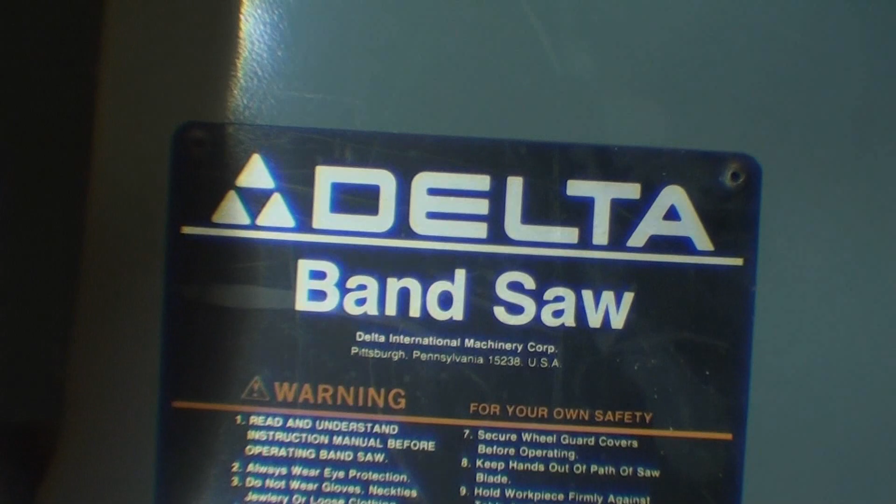All right, I'm going to do a little study here with some old Delta catalogs and show you what they had in the catalogs. You can skip through this if you don't like it.

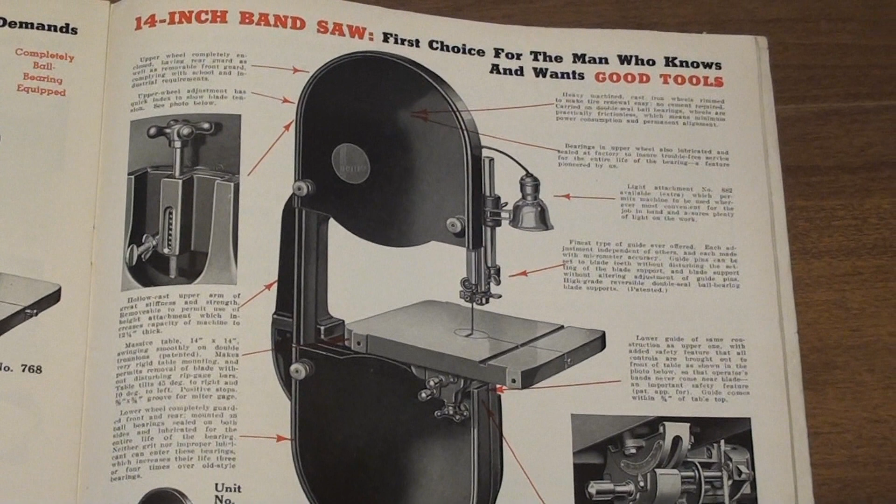This is the 1940 Delta catalog, in kind of poor condition, and it's rather thin compared to the later ones. But there is a full page and a following page also of the original Delta, probably about like what Jimmy had. And it was available only in wood cutting then.

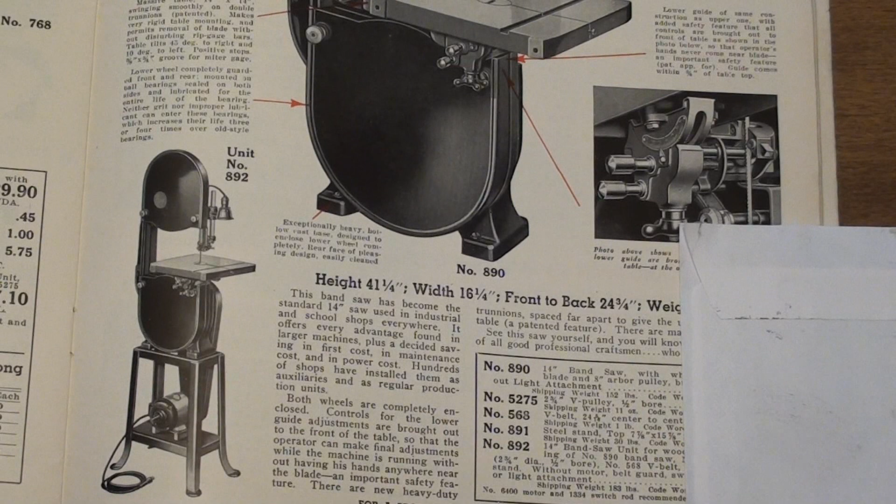But notice the open stand. They sold many different stands for it over the years. This is an open one with the motor below. Came with a work light, and many of the parts are the same. Again, the tubular type casting for an arm.

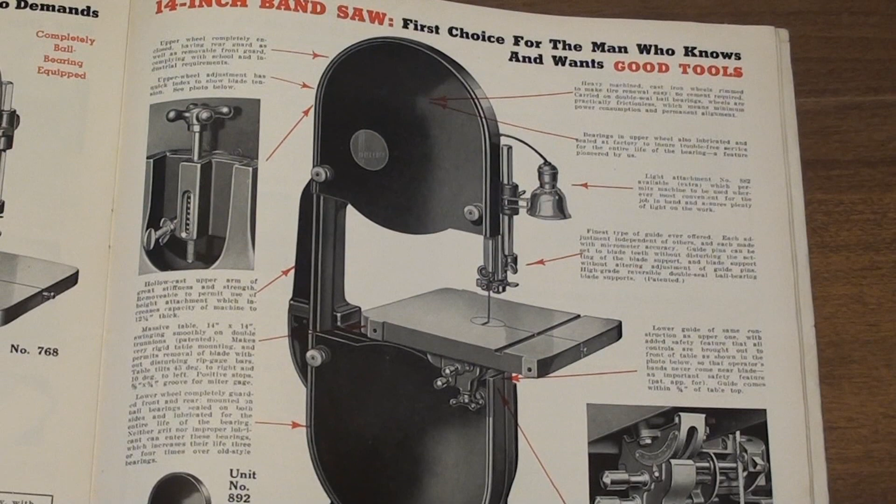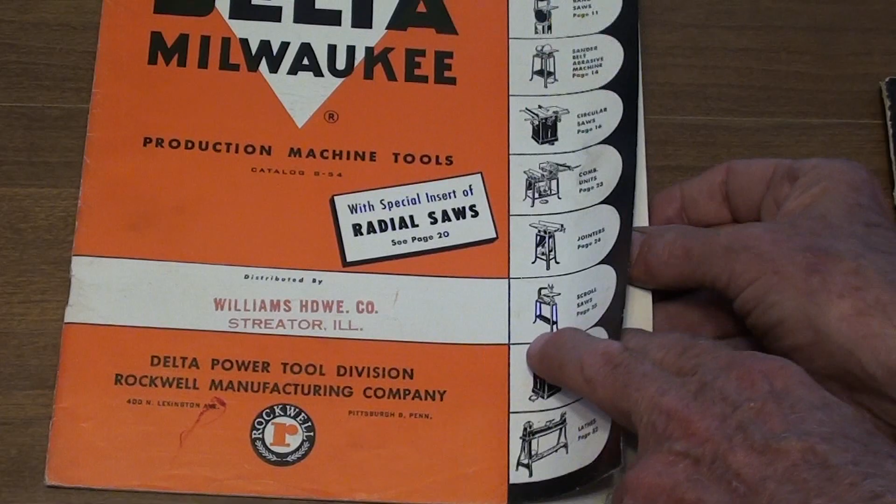Skipping ahead, this is the 1954 Delta Milwaukee catalog. See, they changed the name. In the previous one, it just said Delta, it did not mention Delta Milwaukee. But down at the bottom, they are already a division of Rockwell Manufacturing. And this catalog is quite a bit thicker than the previous one I showed you.

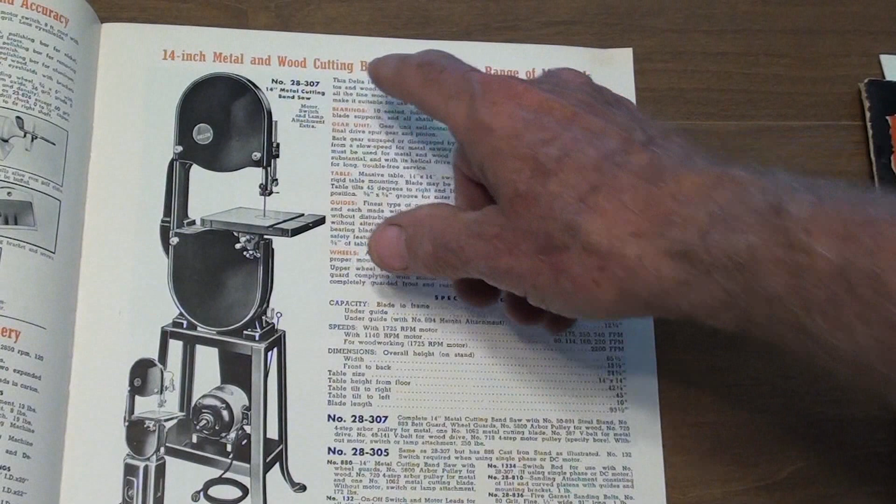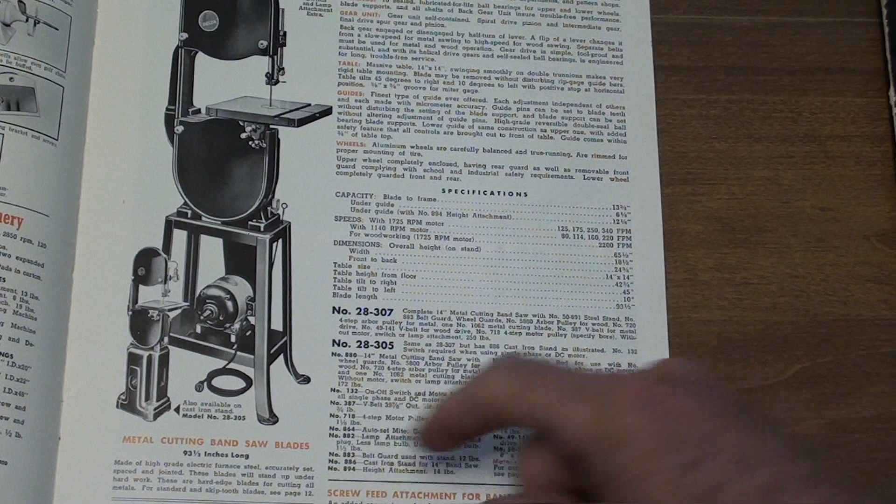Here it is again, wood cutting, but it also says available as metal cutting. And it's available with the open stand or a closed stand, and believe it or not, that stand is cast iron, hollow cast iron. I've seen those stands also used on some of their other machines. What a heavy base that was, and what quality.

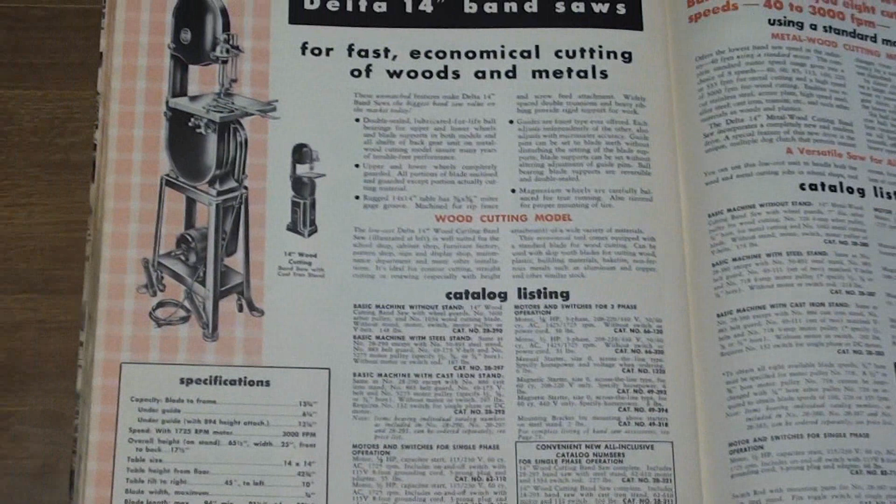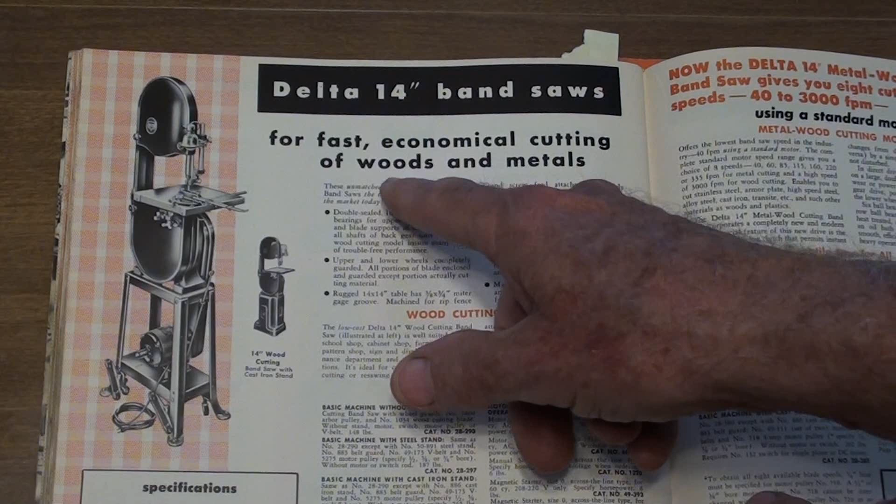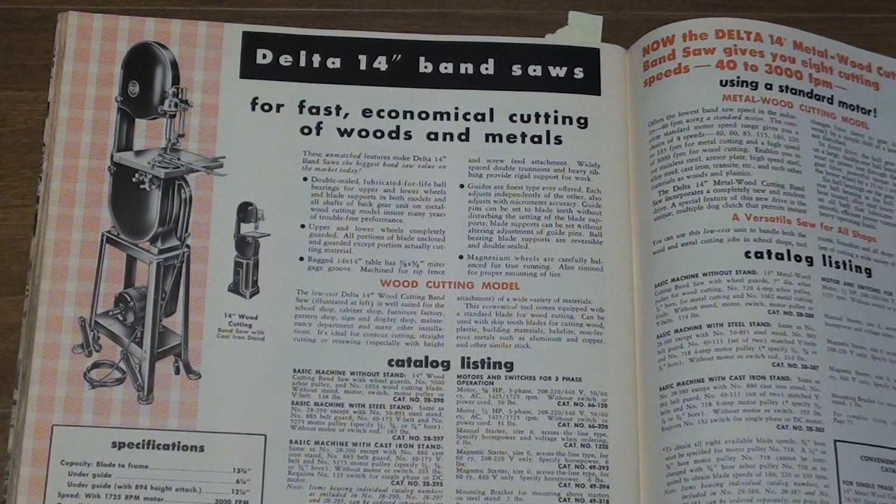There it is again with both bases. Notice that they use a switch mounted on the motor with a rod that came up and turned it on and off. They call it here, again, wood and metal. There is more information on the facing page, and they do not show the metal cutting attachment, the gearbox, but they talk about it briefly. Apparently they changed the design on that several times over the years.

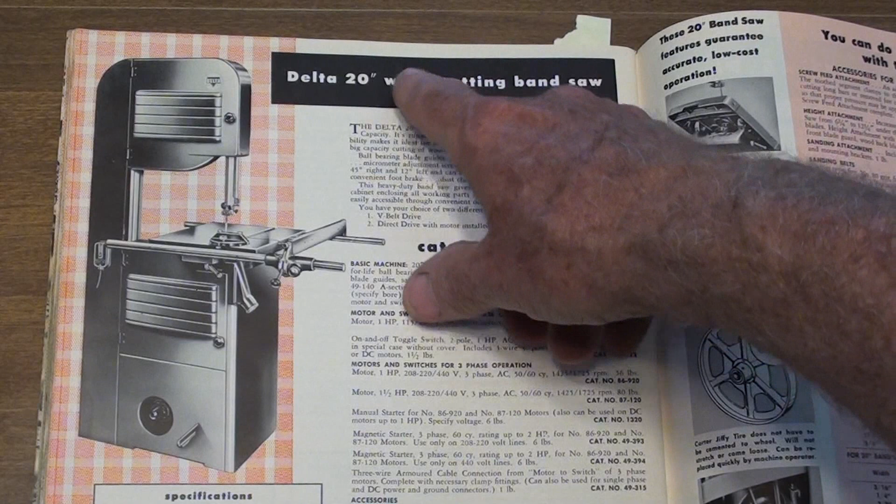At this time, in this catalog, they're also showing their large 20-inch wood cutting bandsaw. I don't believe that was ever available as metal cutting, but my brother did own one of those for a while, and he bought it from a grade school, a junior high.

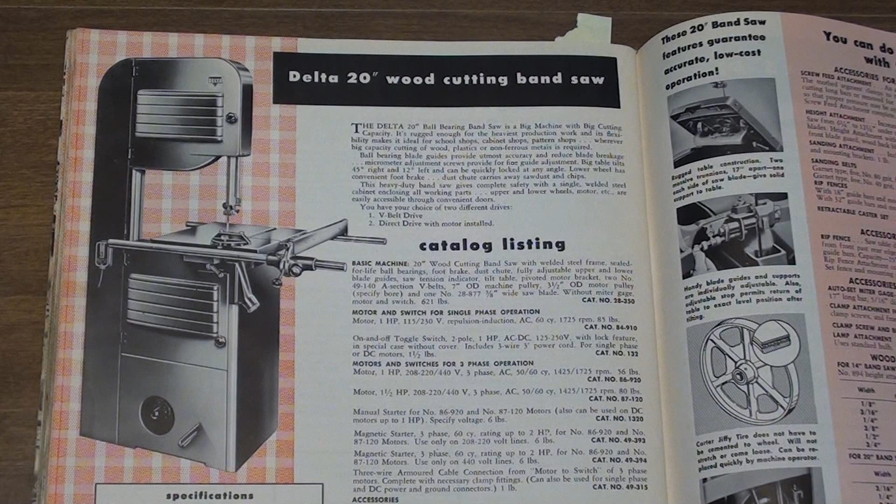All right, I guess that's quite enough on the history lesson here, but in one of these catalogs they talked about the wheels and said they were magnesium. So apparently the older wheels were magnesium. I don't know if they still are - I doubt it, because it would cost too much.

All right, let me talk about this band saw. I bought it in approximately 1977, and I bought it from J.C. Penney, of all places. I forgot what I paid for it - I just don't remember, it's probably written down someplace. I do have the manual.

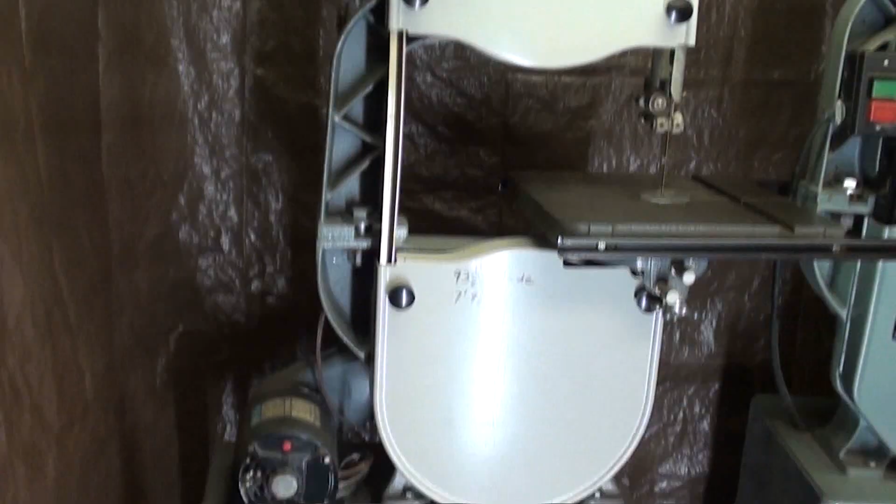But there are several things that I like about it. Originally, I did not like the base, that is the stand that it's on. The bottom two shelves I added so that I have places to put some of my clutter. Otherwise, it was a rather open stand.

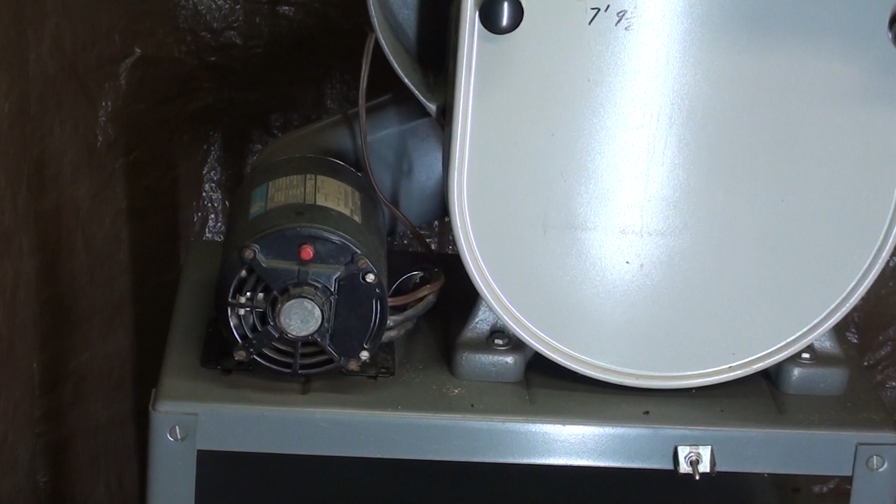The motor is mounted off to the side here, and that's going to be very handy for the conversion I'm going to make, because my gearbox and whatever can be right there, easy to install, easy to talk about. Notice that I made a roll-around stand on the bottom.

It's a three-wheeler. It sits very low to the ground, so it doesn't really raise the saw up much. I copied that off of something, but it allows me to move it around and sweep and things like that.

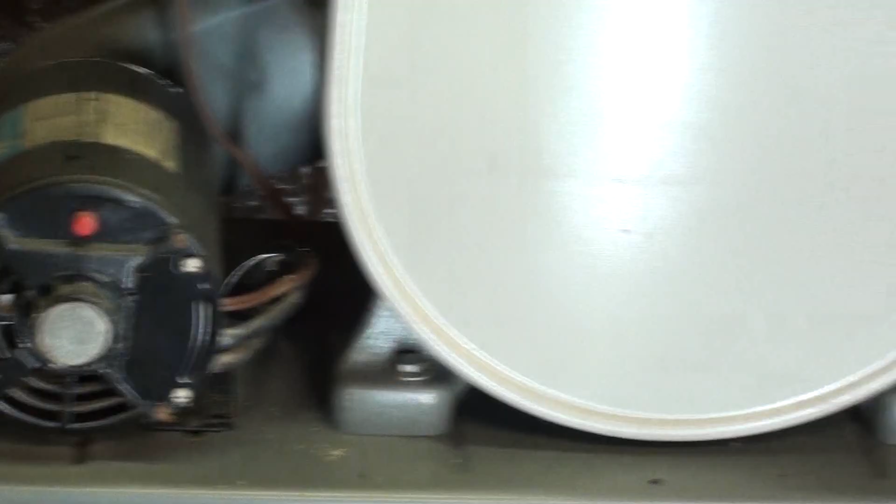Bad features - it is a half-horse motor, but I can't believe they put open motors on there where the dust goes right into them, though I really haven't had any trouble with it. It is not a capacitor start, that probably would have been a better feature, but it's not really a problem, I just don't like the idea. The switch is a simple toggle switch, which you'd think would be prone to failure, but I never had any problem with that either.

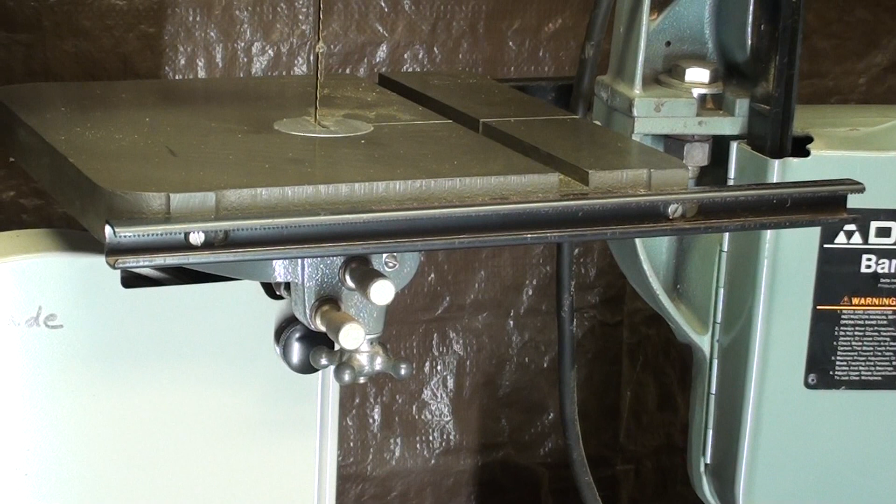I have a light there on a magnet that I can move around. I think they sold a work stand. I did buy at extra cost that fence. Well, the fence isn't on there, but you can see the fence guard there, or guides, or whatever you want to call them.

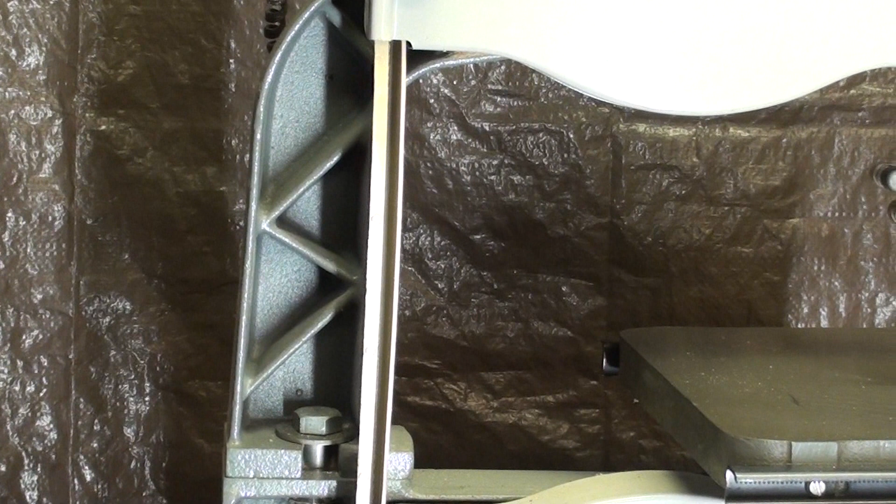And that's the other thing I wanted to show you here on both of the bandsaws - that frame is now webbed, it is not hollow. The hollow ones would have required a core and been quite expensive to build and cast when you think about it. Jimmy's has the riser on there - they were all available with a riser that gave you extra depth so that you could do resawing.

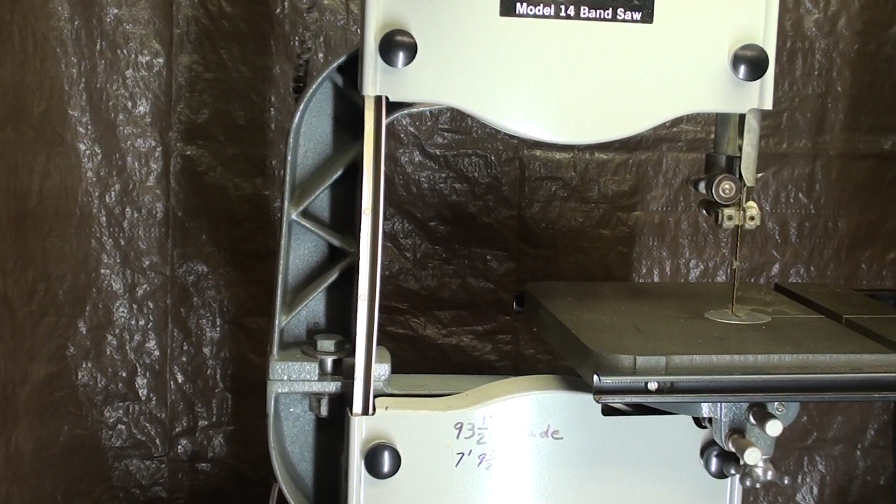Notice that the other model also is open like that, and I don't like it, but that was the basis, and probably what caused me at Peterson Products to have that type of frame on the little bandsaw, the 10-inch bandsaw. By the way, the Delta 10-inch bandsaw was shown in one of those catalogs - I elected not to bother showing you that.

At some point, probably in the 80s or 90s, they got away from these horrible guards that are held on with two little thumb screws. That's just a terrible design. It takes so long to get them off compared to the hinged covers on the more modern machines.

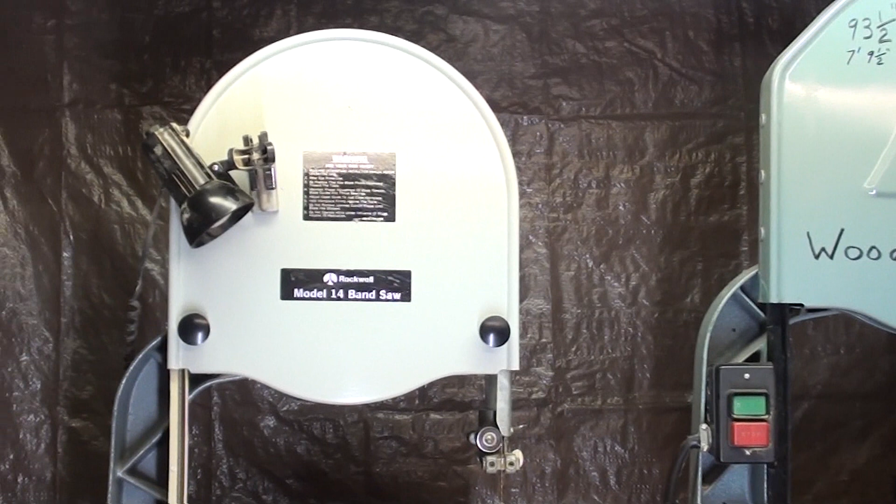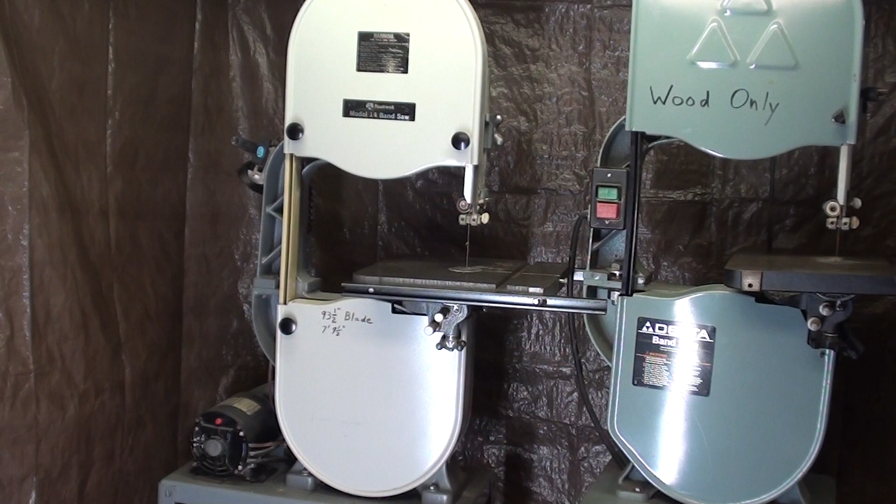Now I'm going to do a little something here. I'm going to step to the side, turn the camera on, and take the two guards off and lay them on the floor, and I want you to time me and see how long that takes. Always turn the power off or unplug your machine when you take the guards off. Here we go, time me.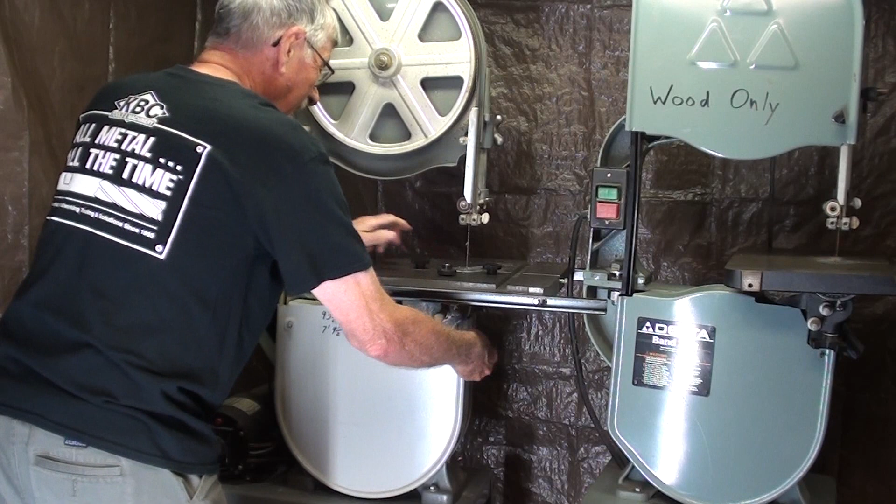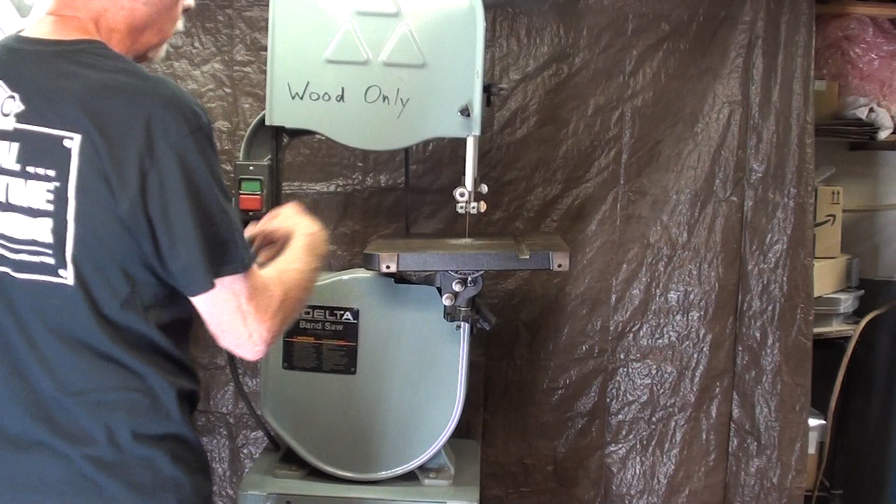Okay, stop the timing. Now I want you to time me taking the guards off, or opening the guards, on this more modern one, and I'll tell you when to start the timing. Okay, start your watch right now. And done, stop the watch.

Now what a difference that makes. Notice the different design in the wheels also—still 14-inch wheels, but apparently aluminum. I doubt if they're magnesium on the left-hand one. But what a difference it is with those guards. I just love them, and it really makes you dread changing blades when you have to take those guards off, and it will take much longer to put them back on than what it took me to take them off.

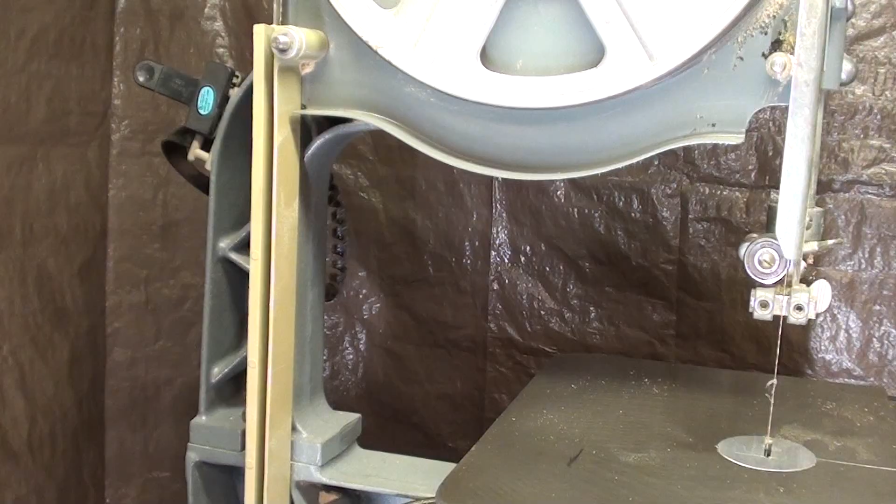This blade guard right here is now plastic where it was wood on the original one that Jimmy had. That seemed kind of cheap. Jimmy made a new one, but this seems cheap too, and you can see that it looks warped and discolored with age, but it's still functional, so I don't really have a complaint about it as such.

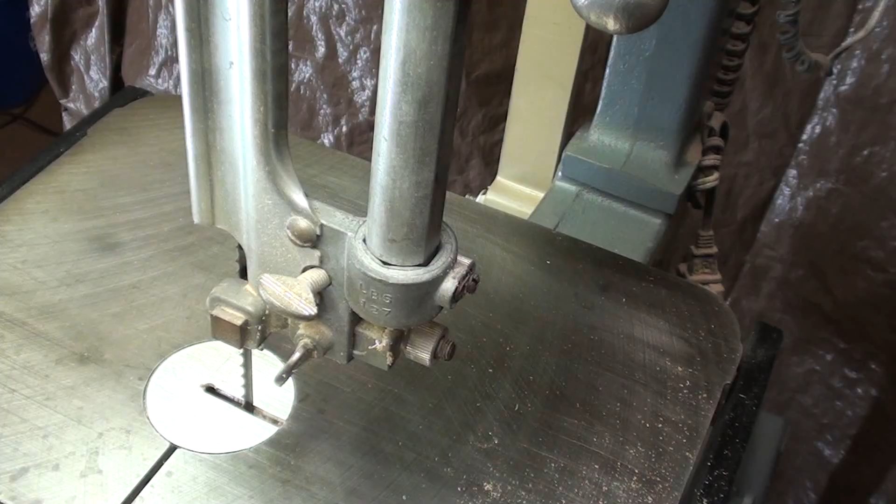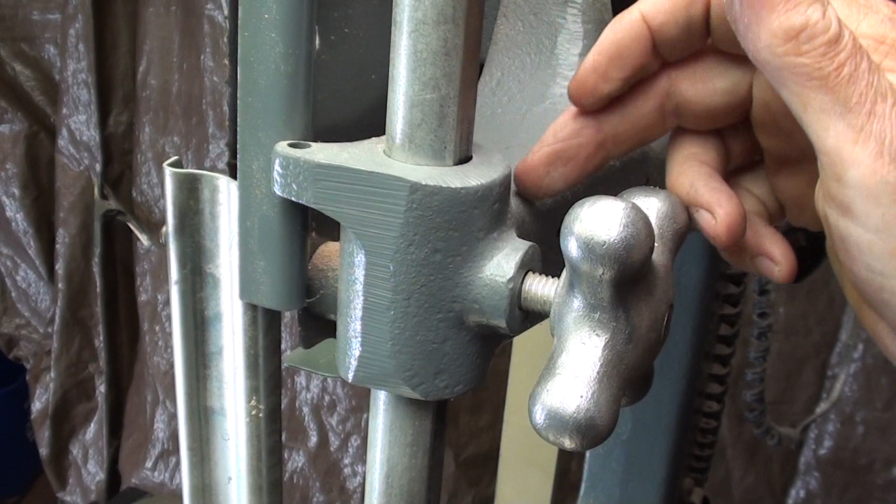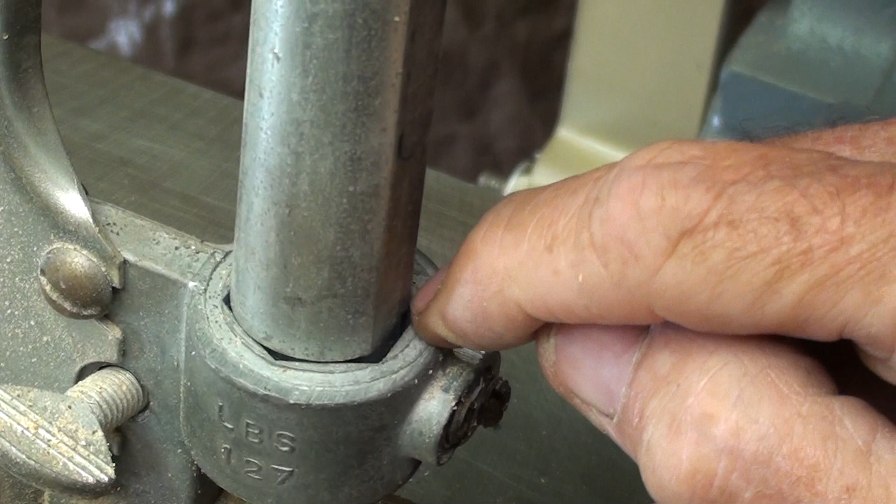I'm at the back of the machine now, and this is the shaft that supports the top blade guide. Notice here that it is round, but has a flat spot on it. Originally they were hexagon, like on Jimmy's. And matter of fact, there are vestiges of this because they weren't in the mood for changing the dies to die cast this piece, so you can still see the hex on there, I think. Can't you? So the bean counter said, no, you can't make a hexagon hole up here—it costs way more than a round hole. So we'll just make this flat, and we'll do it super cheap.

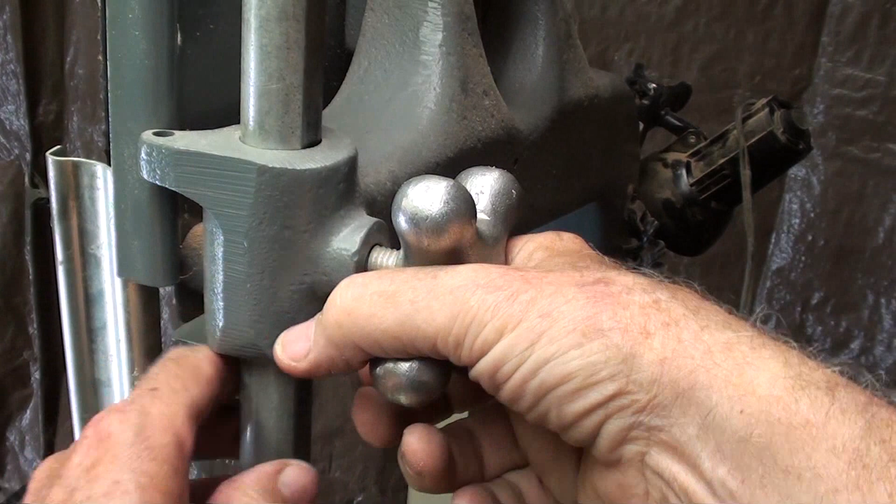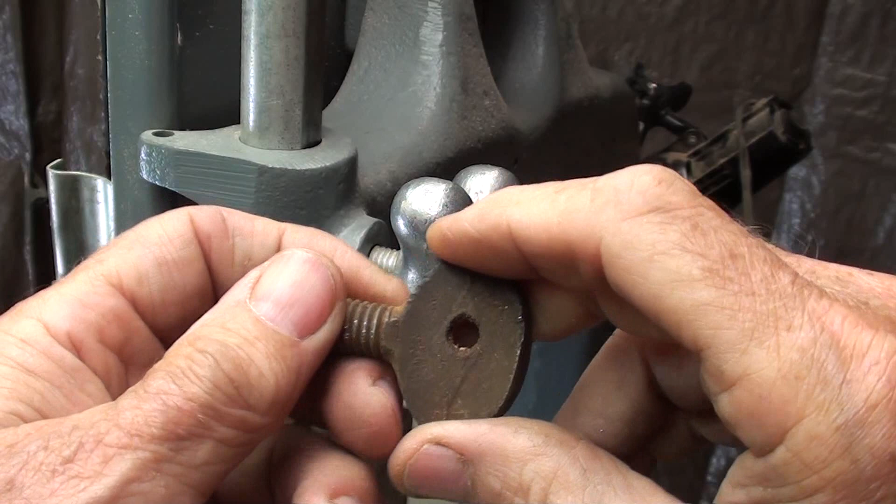Now originally, all they had here to tighten this was this little thumb screw. This isn't the exact one, but that is the right size—that's what they had. It would vibrate loose. You could not get it tight enough unless you put a pliers on it, or drilled a hole and used an ice pick or something to tighten it. So that was a total fiasco.

But I think this is just so interesting, and you have to refer to that DiResta video for this. About 30, maybe 35 years ago, I helped my friend Ron Draper do some plumbing. He taught drafting and couldn't do any plumbing, so he'd call on me all the time and pester me. I went over there and we changed the faucet handle on his bathtub, and it was porcelain. So I took the old one and made a casting. This is the casting, and that's 35 years ago.

And I love it—it's round, you can get a grip on it, you won't cut yourself or any of that nonsense. But when you watch Jimmy's video, you will see that he put a knob almost identical to this, but made of porcelain, and I think it either said hot or cold on there with a C or an H. I thought, how could that happen? That 35 or 40 years later, somebody did the exact same thing I did, other than they didn't cast it, they just used it as is. So I thought that was neat.

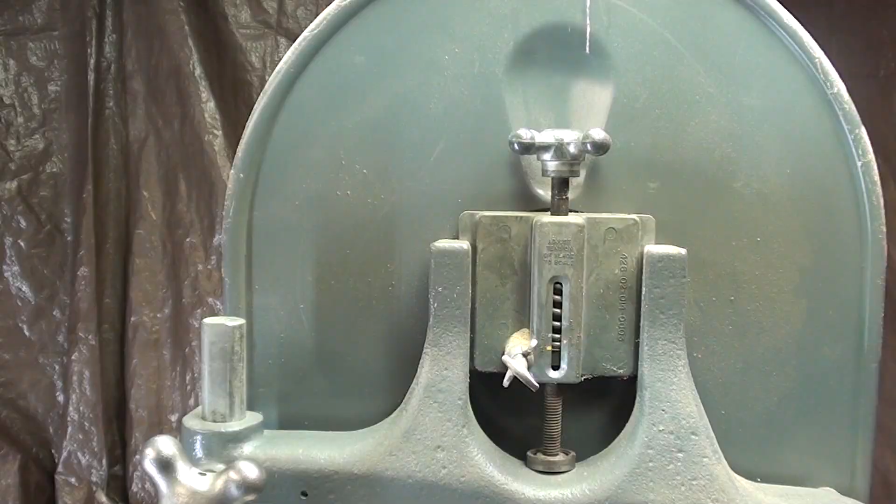This is, of course, the blade tensioning device here, and I never did like this because your knuckles hit. Even though they made this nice little depression here, your knuckles still hit, or you had to come around to the back side of it, and I'll show you how they improved that on the other one.

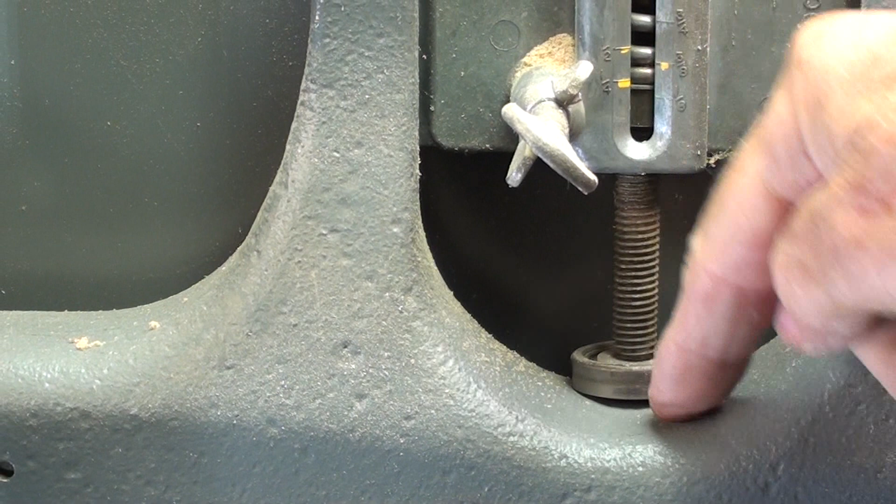Another minor improvement that I made—I forgot all about it—there was quite a bit of friction here where this screw came and hit the casting. So now it's just sitting there by gravity, but it's held in by pressure, a ball bearing that would reduce the friction. Just a little Petersonism.

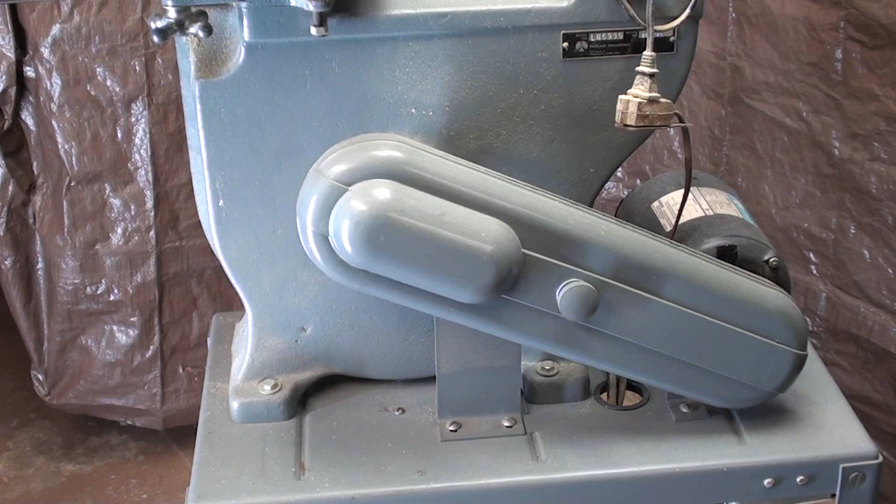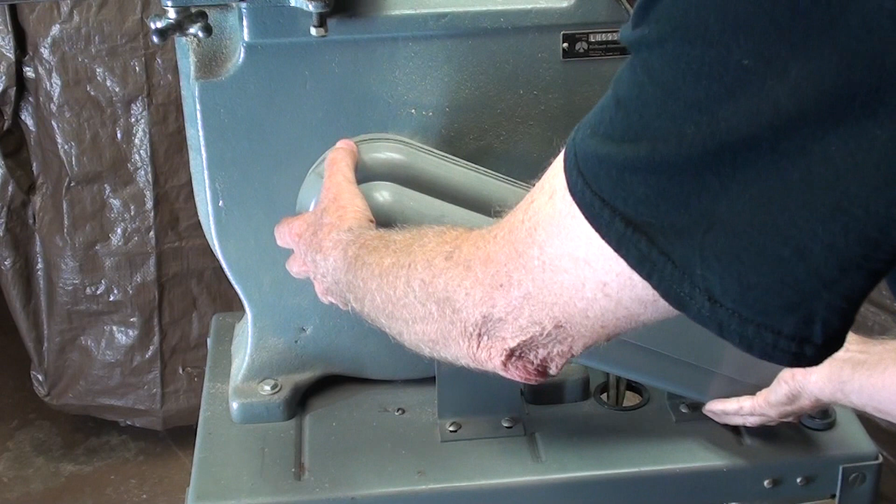Looking down here, a very high quality die-cast zinc belt guard, double-sided. There's just no way that you could get your fingers into that belt. And this is zinc, not aluminum, really nice. That's a 4-inch pulley, I must have marked for some reason years ago. And there are no step pulleys on here - step pulleys wouldn't fit within the confines of this. This guard was probably used on some of their other machines as well.

Now another thing that I did a long time ago, you can't tell it right here maybe, but that's an electrical handy box right there so that I could plug both the bandsaw and the work light into there, and I didn't have to run two cords over. So that's what that is, silly as it might be.

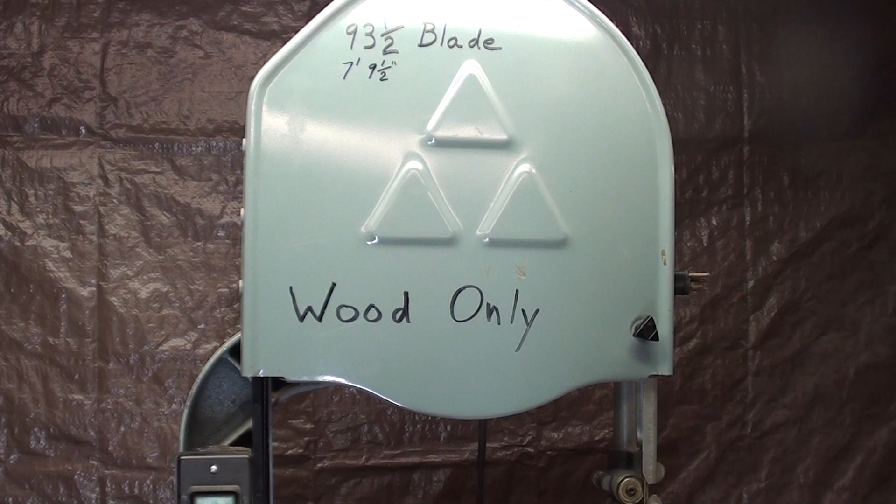Alright, let's turn our attention to this one. Again, I love those guards, but notice that already one of the knobs is missing right there.

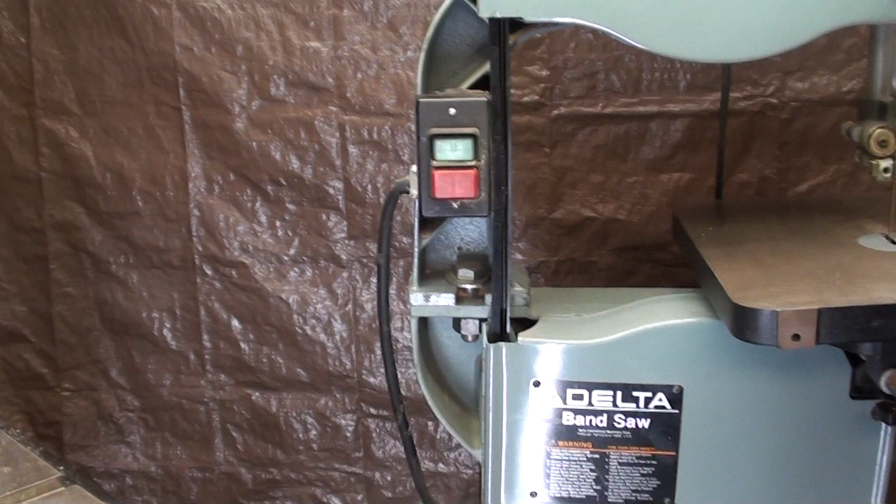This was bought from a high school, but it was used in the art department, so it had almost no hours on it. It was darn near brand new when I got it. And I do like the switch, I like the position of it, and it looks like a better switch than that little toggle switch.

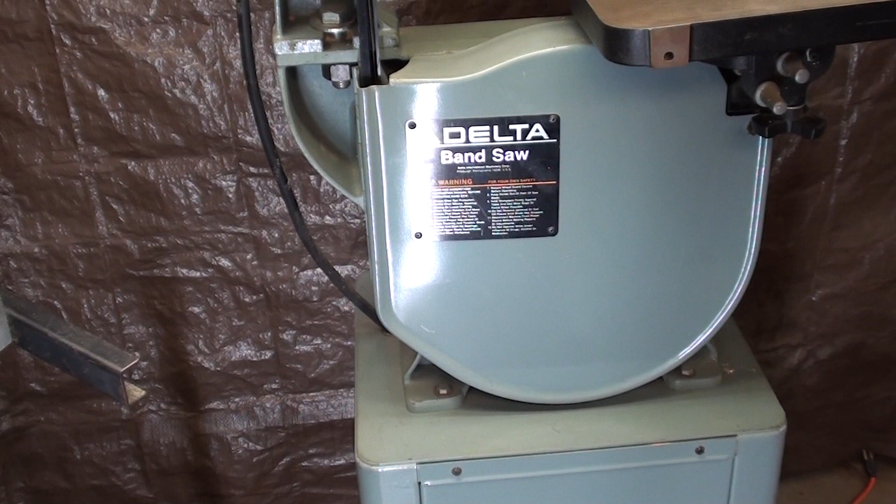One complaint I have with all the bandsaw companies, every one I ever come across, is that they do not put the blade size on it. That has to be put on by the owner, and it's really the only important thing there is, and they fail to do that. Just how much trouble would it be for them to have a little decal or something for that? So I know that has aggravated every man that has ever owned a bandsaw. And if it hasn't, you are a very tolerant person.

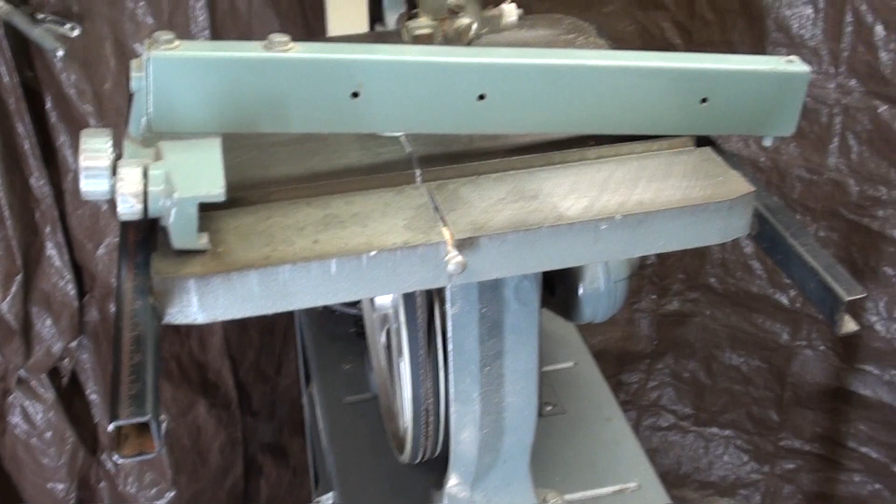Here's the fence. I just dug it out, but I have to confess I haven't used it in this millennia. And of course the slot takes the standard 3/4 inch Delta or other brand miter gauge, so that's nice.

I have this temporarily just on a little bit of a wooden dolly with some casters so I can move it around and into storage. That's why that is there, but it raises it up about 2 inches.

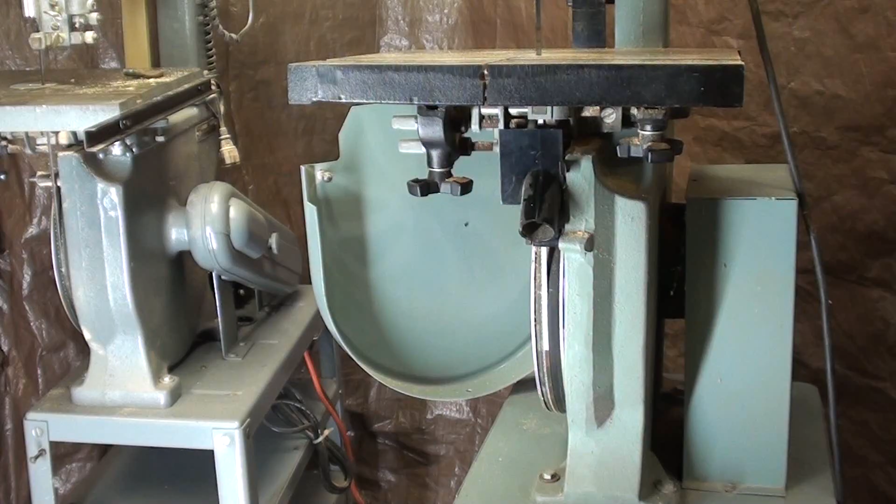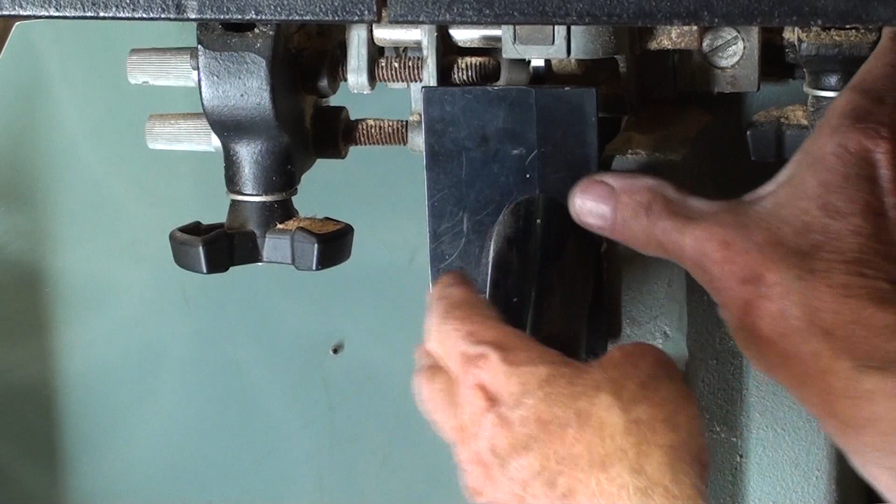For 60 years, count them, 60, Delta did not care about the sawdust or how it would escape from the saw, but finally they put a little chute in here. I don't know if I've ever used it, but a vacuum cleaner I guess fits on there, and this will swing down. I think it needs to be swung down to adjust the blade, so that's kind of a handy little feature, isn't it?

Note that now we have a sheet metal belt guard back here. That's in the shadows, but very poorly mounted. It needs another bracket at the top, so that turns the machine into a rattle trap.

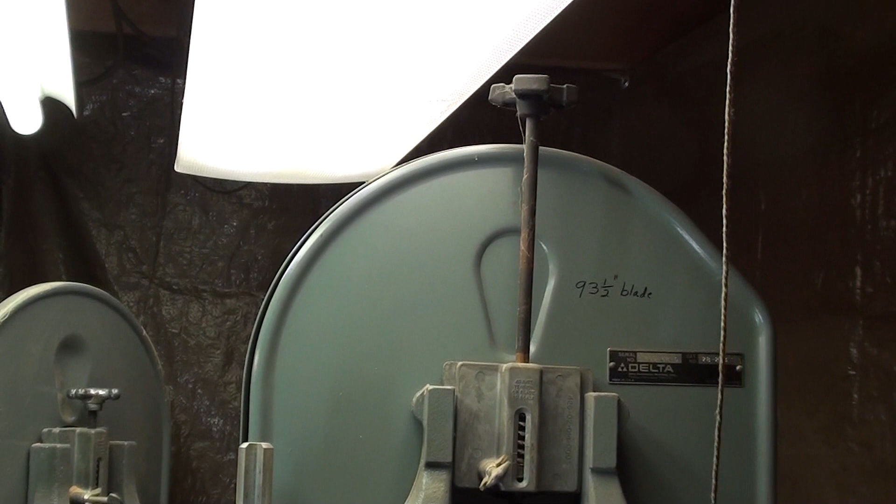Here's a little improvement that I like, and I mentioned it a few moments ago, that they extended the shaft here so that you can grab a hold of this blade adjusting knob from the front side without reaching around. However, you would have to come around and read the little gauge right here, but at least your thumbs do not hit the back of the guard. You got free movement there, but it is a plastic knob, which is a minor disappointment to me.

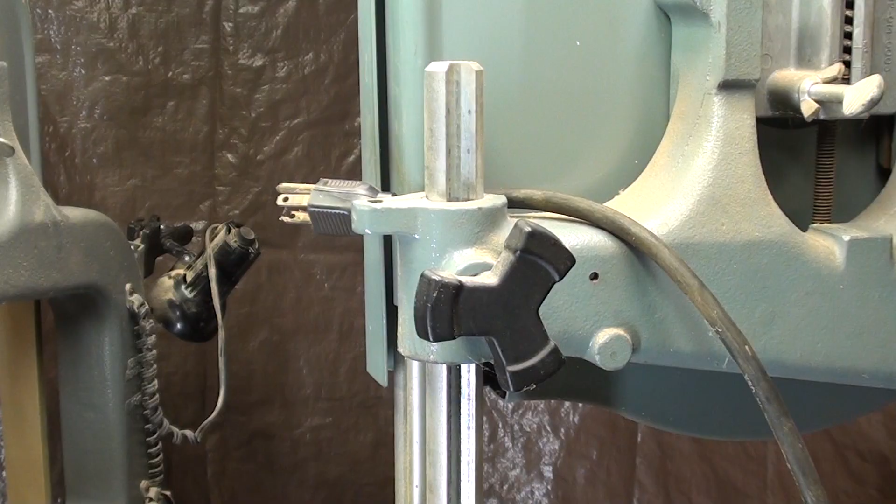Well, finally somebody in engineering said, no, that is wrong. A thumb screw is wrong. We're putting a knob on there, albeit a plastic one, so at least you got some leverage there.

But notice the design change here. We still have a round shaft, but we have a V in it, which should more accurately locate this as far as the twisting of it is concerned when you raise and lower it. So I think that's an improvement, but note that they still have the vestiges of the hexagon down here. That would have been an expensive die, I suppose, to remake, or maybe they had other reasons. I'm just deducing that.

Also notice that this is a different casting, so they made different patterns on this machine. I don't know what that boss is for, possibly a light, as compared to the other one. That's probably irrelevant, but at some point maybe they changed foundries or wore out the patterns and had to make new ones.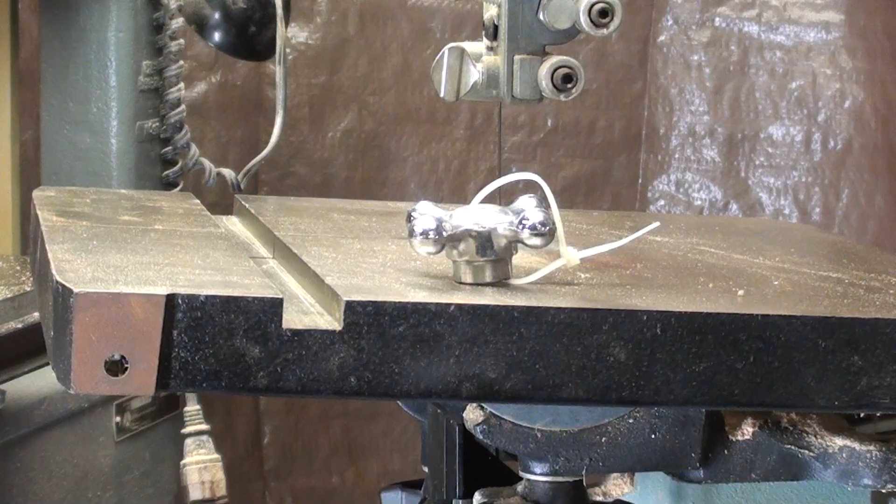Do you recognize this? Yes, it's the ubiquitous die-cast zinc knobs from Delta that were used on virtually all their machines, and they used them underneath the older saw there. Perhaps you can see them for the table adjustments, but no. Could they continue to use them on this model? No, cheap plastic. So that's a disappointment when they make changes like that.

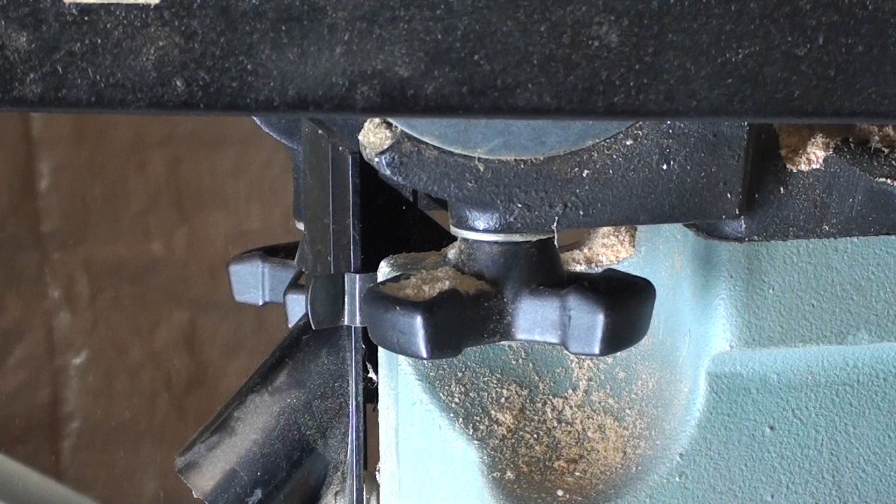At least it is to me, and let me know if it is to you. In all the years I've owned this, I've never had this cover off, and there's also a louvered cover on the front side, you will notice, so I think this is pretty well built.

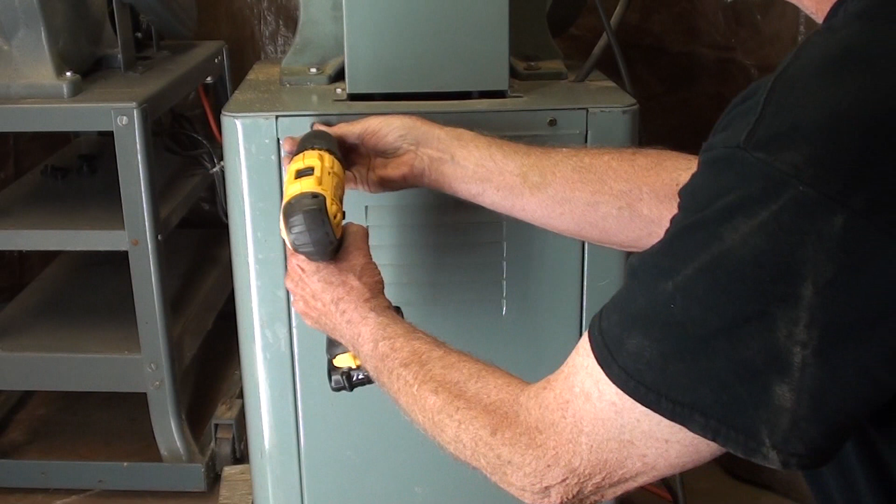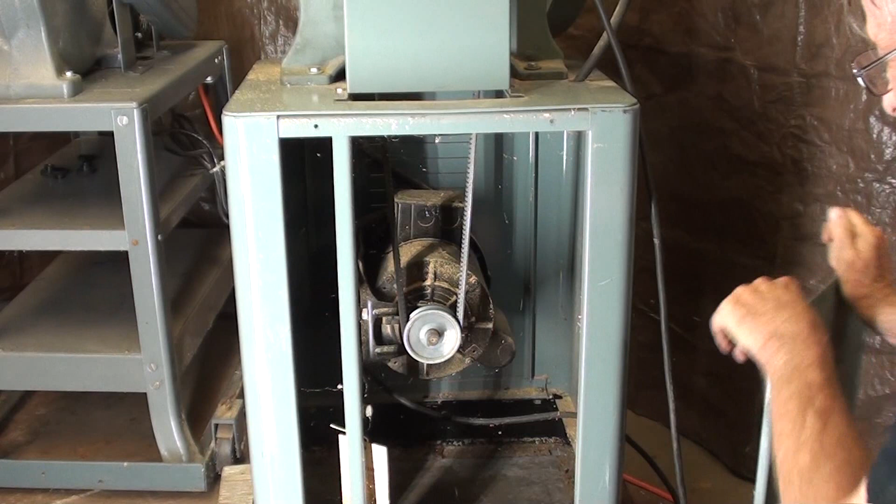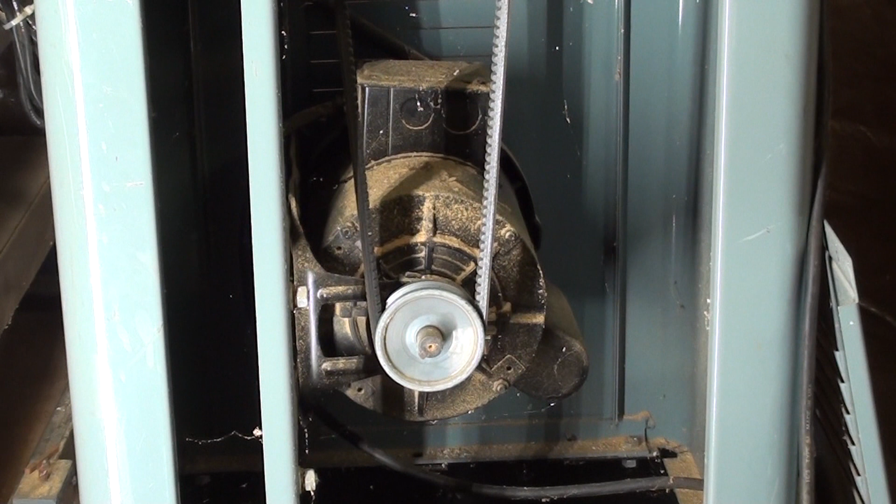Nice looking motor. It's capacitor start, looks heavier than the other one, and that's an enclosed fan cooled motor, so that is a nice motor. I don't know the horsepower, but it is certainly sufficient for the job, and I will clean that out real well as long as I got this open.

It's fairly well sealed because there's not a lot of sawdust in there at all, but that's nice, and it's wired for 110. There's a nice system there for mounting the motor that allows you to adjust it both up and down and in and out for whatever different motor frame you might have. So that's pretty well done.

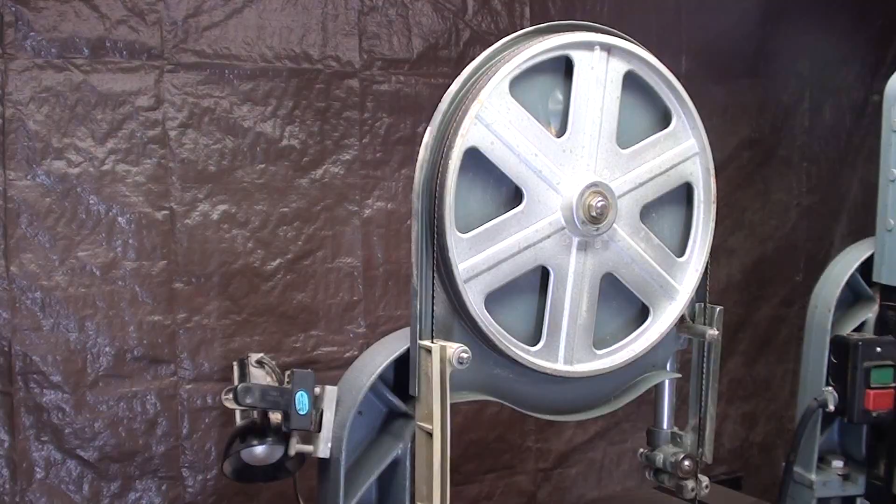As you know by looking at Jimmy's bandsaw, originally these were made in Milwaukee along with their extensive power tool line up there by Delta, but at some point the plants were moved down south, Alabama or someplace down there I think. Probably even for the one on the right here, but they might be out of business now or be importing them, because you could go to Menards or any box store or Grizzly or whatever and buy some knockoff of this for half or less the price of the Delta, so they just absolutely could not compete.

So that'll either drive you out of business or force you into doing the same, meaning manufacturing overseas or importing it by just putting a new decal on it. Well, enough of that, but other than these, these are really very well built.

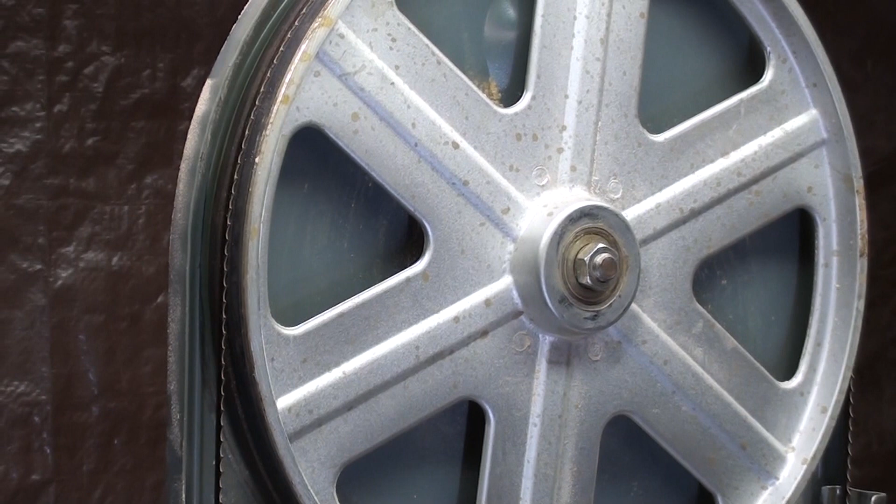They got double bearings here on the top wheel, and then double bearings there in the housing for the lower wheel. And I'm not going to talk any more about that. That might be covered in the following video.

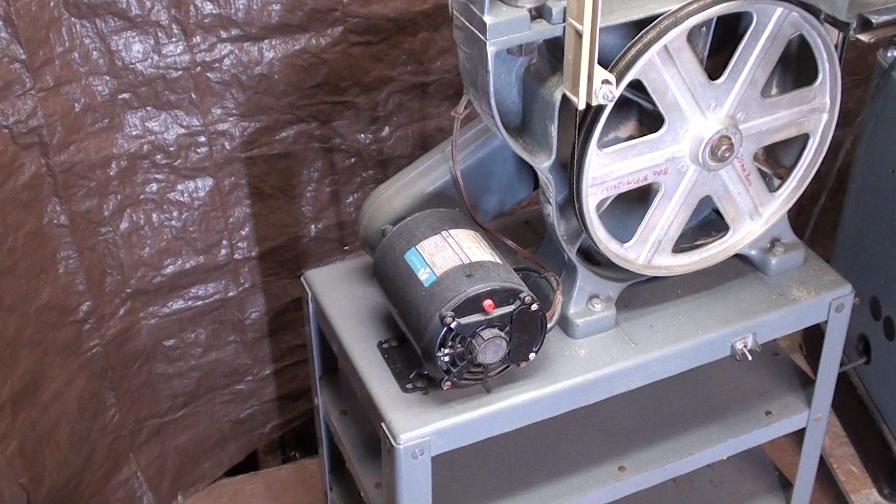But again, my intentions now in the follow-up video or videos is to take this motor off and slow it down to 100 feet per minute or so, and I have tentative plans of doing that three ways, unless it's a failure, and then I'll only do it a half a way and I'll quit, or maybe not even show the video. But since Delta sold it that way with a gear changer on it, a planetary, they use different systems, as I told you.

Probably whoever they could buy it from cheaper if they didn't make their own. But I'm going to take that motor off, or I'll leave the motor on actually for the first one, and if the pull gear fits on there, I'm going to use the pull gear on there and see what kind of speeds I get.

Now I may have to monkey with the pulleys and change pulleys and things like that, and belts, but we'll see how that cuts, or if it works, or if it has the rigidity in the frame and everything to do metal cutting, but yet they would have used the same frame in their metal cutting.

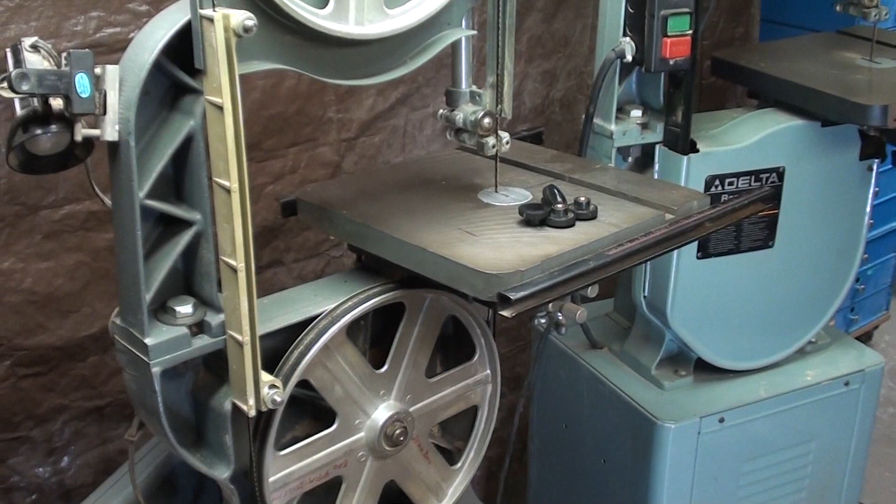In some of theirs, like the one my brother had, if this guide was off here, there was a metal tag there that said wood/metal.

And then my further plans are, I have a motorized right angle gearbox that I might put on there, and as a last resort, and I think it'll have torque for this, I was planning on putting the DC motor on. So that's why I'm saying it might take several videos to cover all of that.

And I am also going to talk about my Boice-Crane machine over there and what I did to that. That is a 2-speed machine, it'll run at a slow speed for metal and a higher speed for wood. But these saws probably can be used for cutting aluminum at the relatively high speed, and I might show that in the following video.

So again, this was more of a history lesson and just a video to talk all about these and explain the differences, and I hope some of this was fun for you, a historical lesson, blah blah blah.